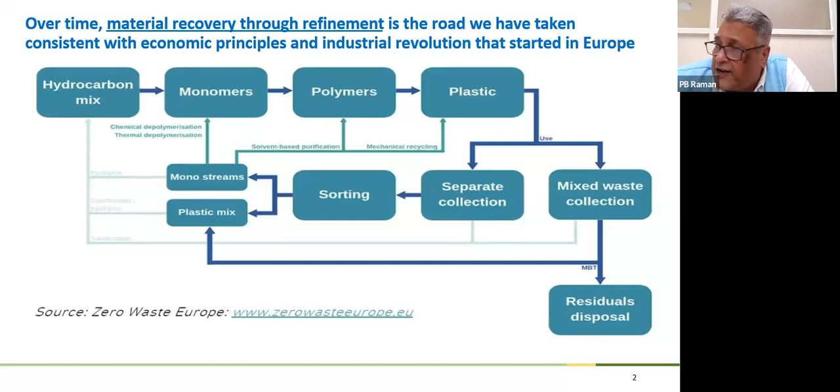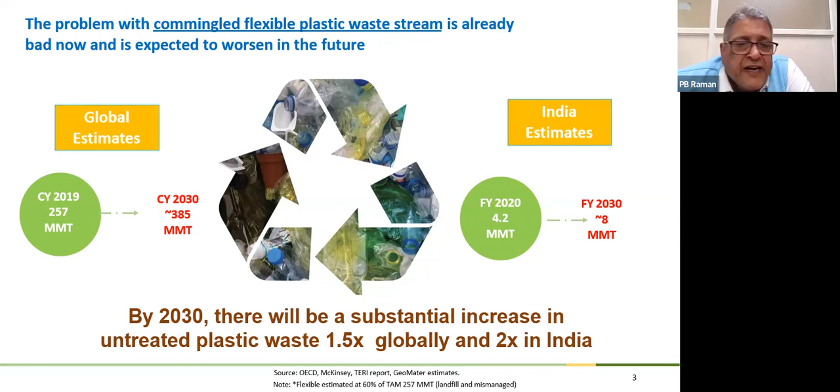This shows the enormity of the problem. What we see today is going to get worse in times to come. If you look at the global estimate for calendar year 2030, something like 385 million metric tons of plastic waste will be generated, up from 257 million metric tons in calendar year 2019. And India is no different - in financial year 2020 we had 4.2 million metric tons of waste plastics, projected to go to 8 million metric tons by 2030. So there will be a substantial increase in untreated plastic waste, 1.5 times globally and 2 times in India from what it is today.

So we are talking about an intelligent way to handle this waste from first mile to last mile - that is, from the source of waste plastic generation to useful products going back to the consumer, with reduced greenhouse gas emissions. That's the objective of this whole development.

It talks about eliminating plastic waste from reaching our oceans, water bodies, landfills and municipal waste, and preventing pathogens from entering the environment. This is important because after COVID, we are all limping back to normal, and so much single-use medical product is getting wasted and dumped - masks or protective equipment made out of polypropylene non-woven fabric, gloves, tubings, IV solution bottles, pouches, and so on. They are all single-use products discarded by hospitals, and there is worry about pathogens because these products still carry toxicity as well as virus and germs. So what do you do to kill those things? We have a machine that will give a product free of pathogens.

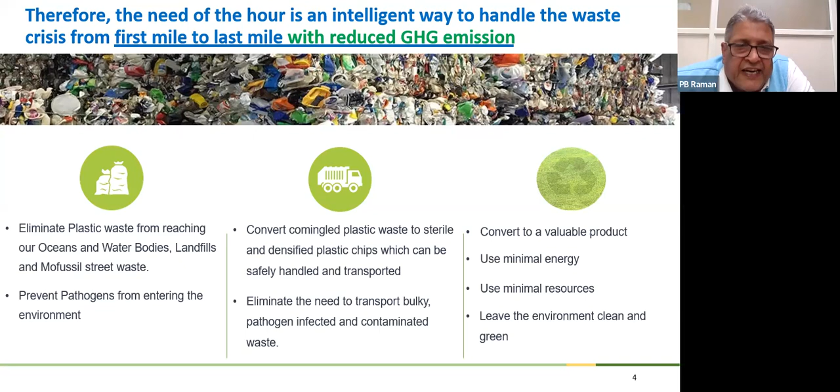I'll come to that - it converts commingled plastic waste into sterile and densified plastic chips. The recycler is a very compact machine that operates on domestic power supply, 220-240 volts. It's noiseless and can be handled even at home, ideal for a cluster of apartments where there's a sizable collection of waste plastics, say from 50 to 100 apartments. It eliminates the need to transport bulky waste plastics, because waste plastics are bulky - blow molded or injection molded containers or films, and most plastics have density around or below one. So you have to compact them. The machine processes any item thrown into it into a chip by melting and converting it. Once you have it in compact form, like a granule, you can handle it and move it to another site, to a bigger machine that can take it and convert it into lumber. That is the concept we are talking about.

This chart talks about intelligent compounding at the heart of manufacturing, whether it's a pharmaceutical product, plastic, food, or biomaterials. This much-needed emerging technology recognized by regulators is intelligent compounding. Compared to other technology, our intelligent compounding engine has increased capability by 100 times in sophistication during a 30-year journey to reach this critical stage of deployment.

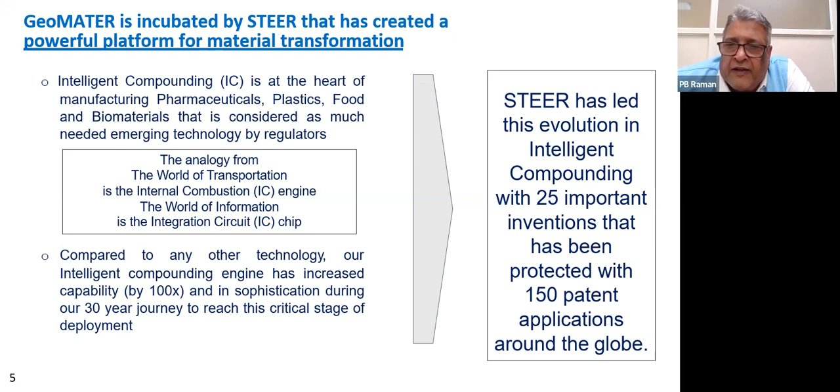We are talking about a co-rotating twin screw extruder system, which can be employed not only in compounding of plastics, but also in inline processing of recycled plastics with other ingredients, extruding a continuous lumber or cross-section or profile out of waste plastics. So we are talking about two machines - one that compacts the plastic at its origin where the waste is generated, and another bigger machine that converts the waste plastics into lumber. Steer has led this development of intelligent compounding with 25 important inventions protected by something like 150 patent applications around the globe. These inventions are, in a nutshell, the technology of processing waste plastics into useful value-added products like lumber, with the addition of various ingredients to fortify the waste plastic into a stiff wood-like section - covered by certain innovations and inventions.

Now we come to the machine that compacts the waste plastics. We call it SafeRecycler. It's a miniature machine, but you can scale it up. The machine we are showing is 10 kilo per hour and consumes only half a unit per kilo of converted plastics. It's noiseless, and what you put in and take out is totally pathogen free because the material undergoes a sterile heating cycle where none of the bacteria or viruses will survive.

So the chip or granule you get out of it is pathogen free. That's in a nutshell the feature of this machine.

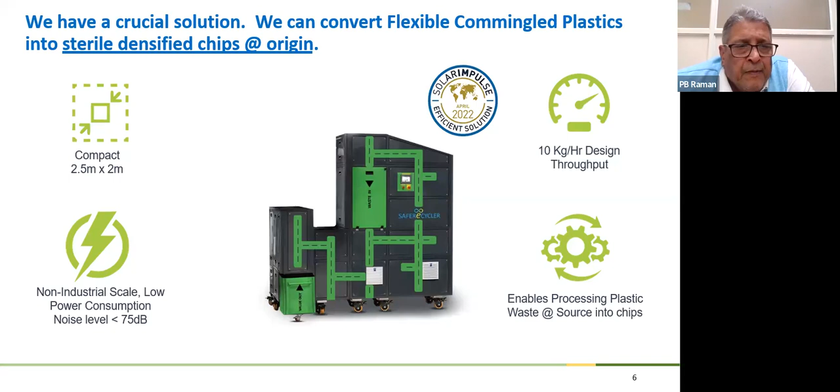If you compare this machine with other existing recycling machines, different makes we have compared with, you see that the SafeRecycler ticks on all the points.

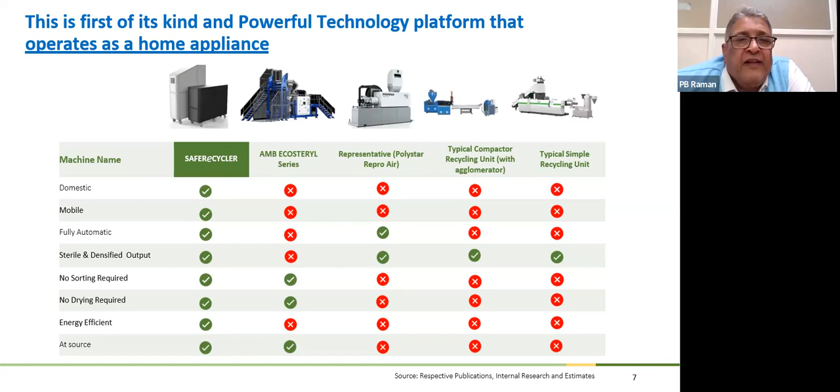From operating at domestic level, mobility of the machine, automation of the machine, sterile and densified output - I talked about that, no sorting required. What you dump is all mixed plastics, you don't have to sort it or segregate it. It's energy efficient, half a unit per kilo output, and it's processed at source. Where the waste plastics are generated, it can be put there and converted into a compact form.

I'd like to mention that the urban population in India consumes as much plastic as Western populations. If you look at overall figures, India may be consuming only 12 to 13 kilo per person per capita, whereas the global average is something like 80, and advanced countries like USA and Europe are at 100 kilo per capita. But really, at the urban level, we consume as much plastic as others. So the problem of waste plastic generation is as much an issue in our urban areas as it is in other countries.

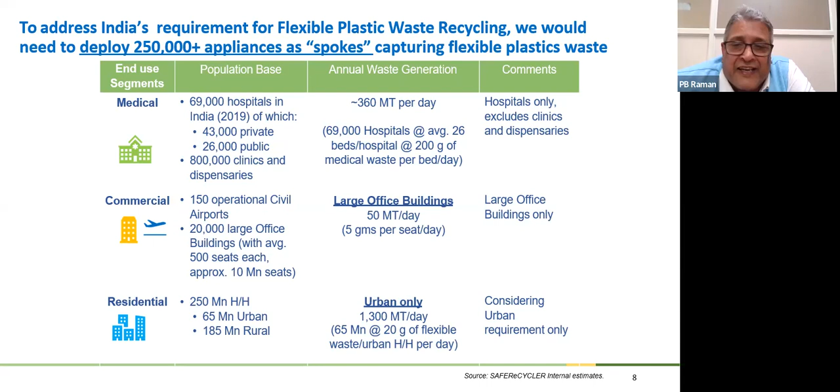We fortify the waste plastic because if you look at it, most of it is packaging materials - flimsy, flexible pouches, films and laminates that don't have stiffness. They weren't originally designed for stiffness; they're designed to protect the product, whether it's a food item or anything else, to guarantee shelf life in the shop. So you need to stiffen this plastic to convert it into a wood substitute like lumber.

We do it with minerals, from calcium carbonate to clay, to natural fibers like jute and hay - we have experimented with those - and then long fiber like glass. We use glass rovings, not chopped glass, to reinforce the product and add the stiffness needed for the final use. We go through a system of compatibilizers, coupling agents, and antioxidants to get the profiles.

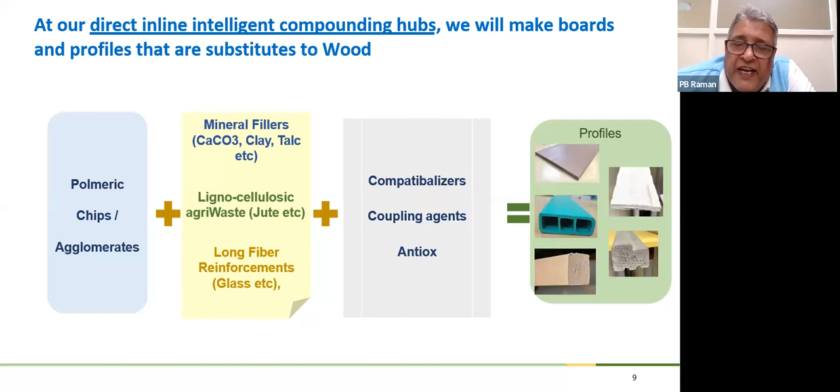What I've shown here are sections, sheets, rods, door frame profiles, and lumber sections in 25 or 25 by 75, rectangular and square sections, solid sections. You'll also find we are using blowing agents to get porosity in the material, to make it lighter.

This is the R&D plant that we operate. We will scale it up very soon when the Geomater company is formed. This is basically an extruder - we start with the extruder, put the material in the hopper, and take out a product which is extruded. It goes through a system of water bath and vacuum section.

Yes. Anybody asking for any question? Should I go ahead?

So it goes through the takeoff equipment for any extrusion product - water bath, vacuum section, and haul off equipment like a caterpillar and cutting. You have to cut a long extrusion section to 4 to 5 meters so it can be handled in a truck when you send it out. So that's a picture of that extruder line as you go.

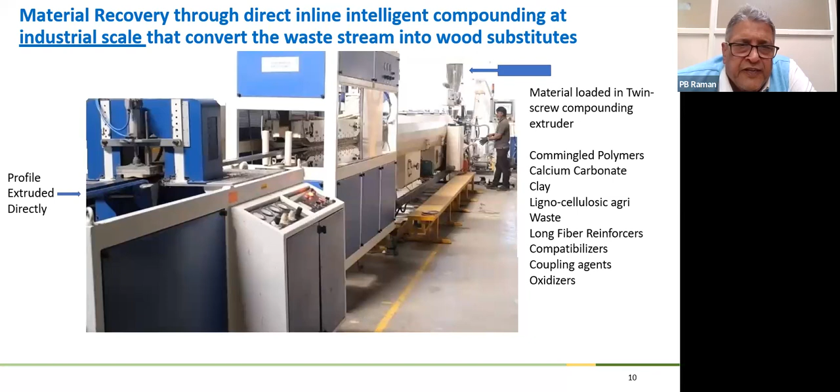Now these are different products that we have developed so far. We have solid panels, and the wall panel, which we extensively use for cladding - balcony wall claddings where wood cannot be used for reasons known to you.

Door frame is a very interesting product. It's picking up very fast in India because wood is scarce and good wood is not available - teak wood is very expensive nowadays. Also, people have realized that wood gets eaten away at the floor when aggressive chemicals are used, especially after COVID when people use very aggressive chemicals to mop and clean the floor, and they corrode the lower end of the door frame.

So people have preferred to go for synthetics, and the first one to be used was sawdust-filled PVC profile - WPVC, wood PVC.

Not WPVC. So we have found with the recycled plastic, we are able to develop a door frame which is half the cost because PVC is an expensive material. We have been able to achieve this, and we see good acceptability on a commercial angle for this product.

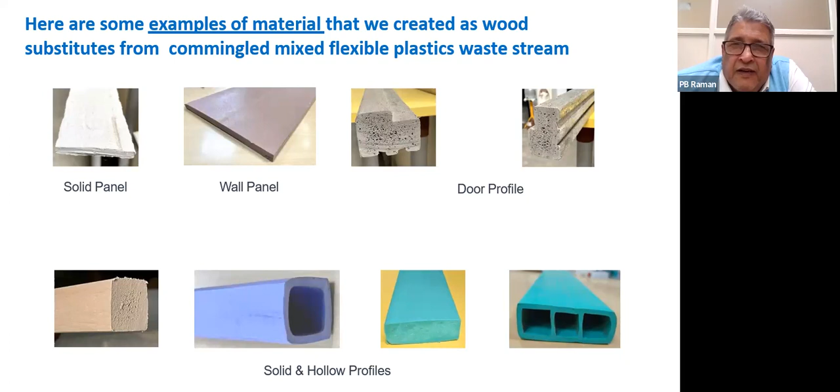People salvage - they remove the motherboard, connectors, contactors, and just offer the moldings. The moldings are crushed in a mill, and we use that. It's available in plenty nowadays - e-waste generation is very high. Whether it's a keyboard, a monitor, or a cell phone, their life is short, not more than 5 to 10 years. So they keep coming to the market.

You'll see a lot of products that we have developed out of the lumber. Ideally these products are very good for outdoor use, for garden furniture or a park bench, because nothing happens to these items - wood will not last as long. If you want, there are ways to add more value by painting it, and even have it at home inside your house.

Dimensionally very accurate. Pallets are a very huge opportunity for this lumber because globally wooden pallets are used and people are wanting to move away from wood. So that's another huge application we have.

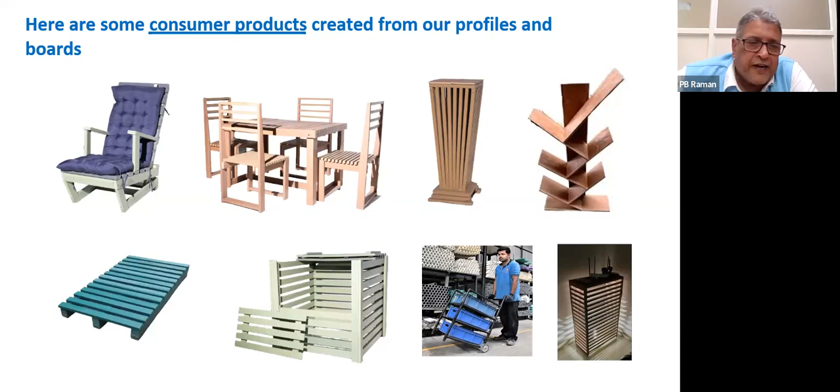We can go on with more items - yeah, these are items that we have developed. We jointly work with the National Institute of Design, who give us inputs on ergonomics, how to design a chair for comfort and all those things. So we incorporated some of those features in our furniture.

Now we don't make furniture ourselves. We have shown the possibility of making this furniture for people to buy our lumber and start a business, because to start a business you don't need much investment. You need space and basic equipment for woodworking that you're familiar with - saws, chisels, and those kinds of things.

Material recovery through direct inline intelligent compounding has the following merits: long fiber reinforcement, which I mentioned, to stiffen the lumber; control over density by foaming - you can use azodicarbonamide or other foaming agents to reduce the weight of the product; and high quality devolatilization, because our extruder can handle that. It has a vacuum section which devolatilizes all the unwanted odors and vapors coming out of recycled plastics.

Coupling agents render the material inert, as I mentioned, thoroughly homogenizing and compatibilizing to enhance impact strength, because that's the function of the extruder. An extruder is supposed to homogenize the melt with all the ingredients and recipes we put in, so that every ounce of it, when it comes out, is consistent. In the case of recycled plastic, different plastics melt at different temperatures, but when it exits the extruder, it's a homogeneous melt. That's the wonder of this machine.

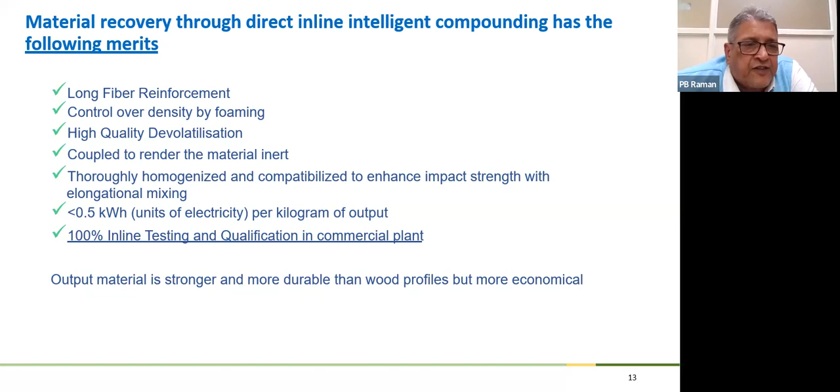So in conclusion, the problem of co-mingled and contaminated plastic waste material entering landfills and oceans around the world can be avoided with this system - post-COVID, urgently needed for safe, pathogen-free recycling in hospitals and communities. The solution converts mixed, co-mingled, multi-layer contaminated plastic waste into valuable structural products, leveraging a SAFEReCYCLER that converts unsorted, uncleaned, mixed plastic waste streams consisting of various flexible materials - polypropylene, polyethylene, polyester, polyurethane, nylons, and rubbers, and so on.

I'll give an example of a mask, the simple COVID mask. It's made of three materials: one is the non-woven polypropylene fabric, second is the elastomer - the elastic band used to wear it, and third is a small steel rib that gives contour on the nose. So there are three materials, and this machine will handle all three and crush it. You'll have trace metal in it certainly, but it's immaterial for a lumber application.

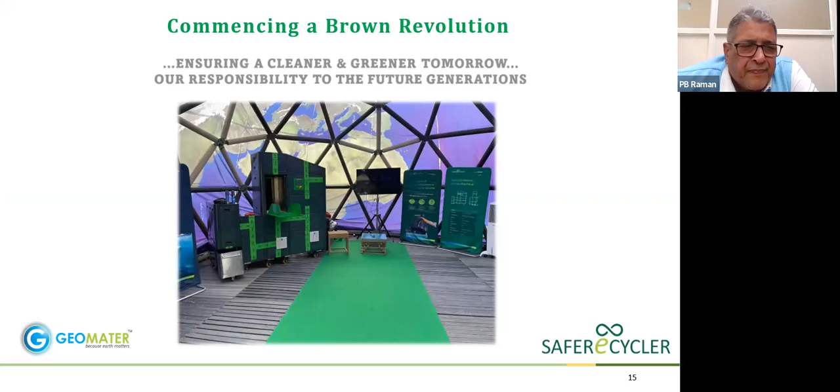Hope you could follow through the presentation. Yes. Wonderful, I think the explanation is perfect.

What about Mr. Chaminder? Yes, thank you very much. I think you touched all the areas relevant for this new innovation in plastic multi-layer packaging. I have a small question. For example, there are some Tetra Paks - I think most of that waste is not recyclable. Can you use this?

If you look at the Tetra Pak composition - paperboard, aluminum, and plastic - there's not much plastic in it. It's more of paperboard and aluminum.

People salvage aluminum out of it by dissolving it in caustic soda, making it into sodium aluminate, and then getting back the metal. In the process you get a byproduct which is like a pulp, which is used for paper recycling. There's very little plastic - I don't think they really bother to separate the plastic and use it.